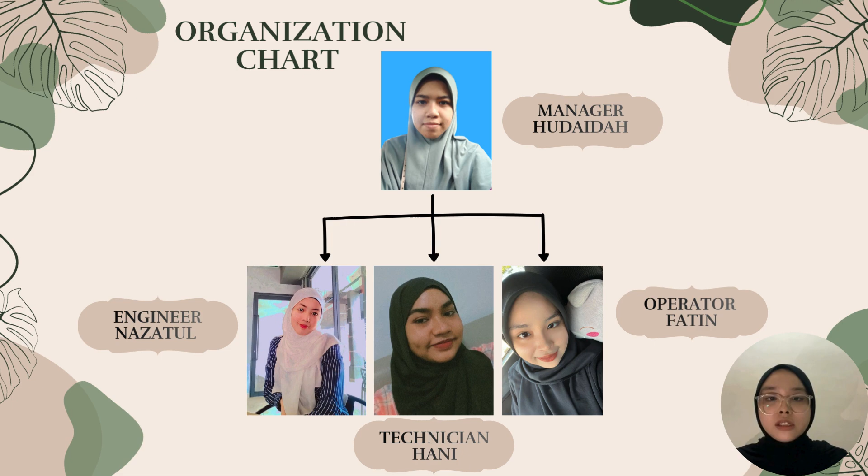I would like to begin my presentation by introducing the background of our study, which focuses on wastewater management in the Hulu Langat area, Selangor. Effective wastewater management is very important because it plays a key role in protecting both public health and the environment. Wastewater that is not properly treated can contaminate rivers, groundwater, and surrounding ecosystem, which may lead to serious environmental degradation and health risks for nearby communities.

In recent years, rapid urbanization has occurred in Selangor, particularly in the Hulu Langat district. This rapid development has resulted in a significant increase in population, housing areas, and industry activities. As a consequence, the volume of wastewater generated has increased, along with higher pollutant loads into the wastewater treatment system.

Hulu Langat has experienced significant development pressure, especially from residential and commercial growth. This development placed a heavy burden on the existing wastewater treatment plants. Many of these treatment facilities were originally designed to serve smaller populations and lower wastewater loads. However, due to current growth, several plants are now operating near or even beyond capacity.

When wastewater treatment plants operate beyond capacity, their efficiency may decrease. This can result in incomplete treatment, higher pollutant discharge, and potential non-compliance with environmental regulations. Over time, this situation may negatively affect river water quality and downstream ecosystems.

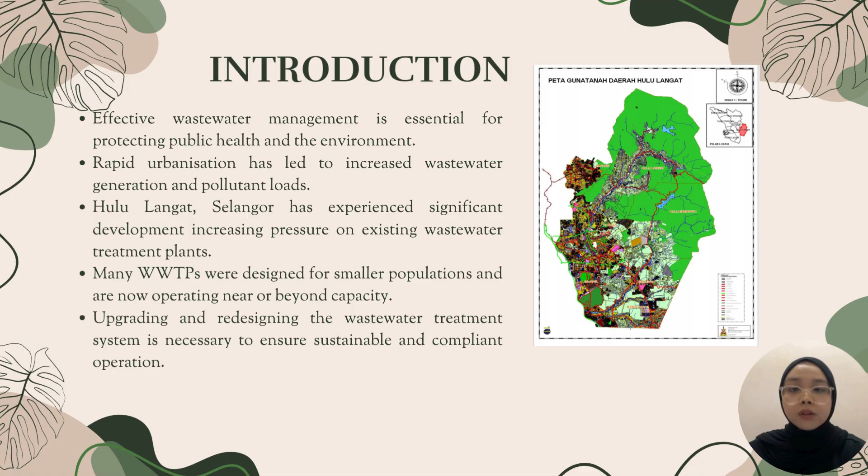This study highlights the urgent need for effective wastewater management planning in Hulu Langat. Understanding the current challenges faced by wastewater treatment plants is essential to support sustainable development, protect water resources, and safeguard public health for future generations.

Next, I will explain the problem statement of this study. One of the main issues faced in the Hulu Langat area is rapid land use change. Urban development such as housing, commercial areas, and road construction has significantly altered the natural landscape. As a result, surface runoff has increased, carrying higher amounts of sediment and organic matter into the wastewater system.

These changes have placed additional stress on the existing wastewater treatment plants. Most of the current WWTPs in Hulu Langat were originally designed to handle lower flow rates and smaller population equivalents. However, due to rapid development, many of these plants are now operating under overload conditions, which reduces their overall performance.

Another major problem is the high sediment and organic content in the incoming wastewater. Excessive sediment interferes with primary treatment processes such as screening and grit removal. When these systems are overwhelmed, sediment can pass through to downstream treatment units, causing operational inefficiencies.

Operational issues have also been observed within the treatment plants. These include increased sludge blanket rise, reduced treatment efficiency, and higher maintenance requirements. Such problems not only increase operational costs but also raise the risk of system failure and non-compliance with discharge standards.

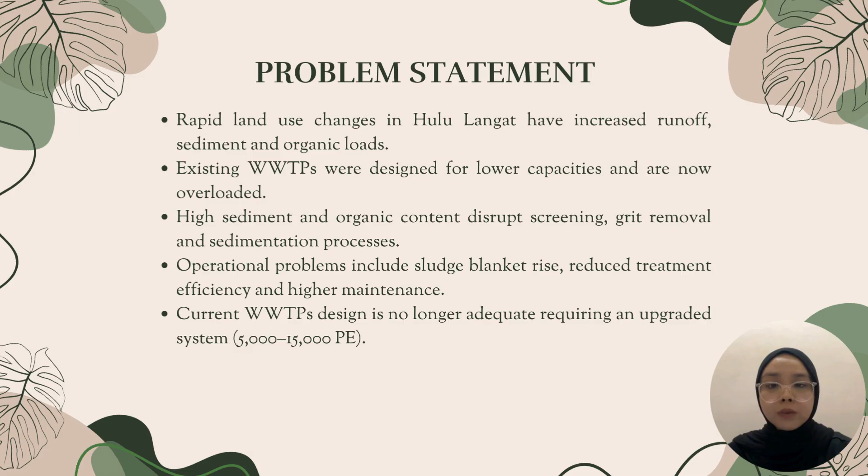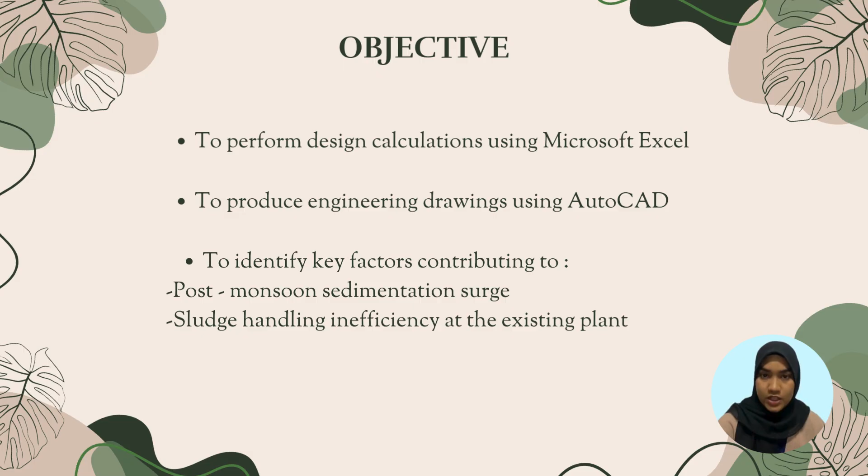Next, I would like to explain the objective of this project. The main objective is to carry out design calculations using Microsoft Excel and to prepare engineering drawings using AutoCAD. Furthermore, this project aims to identify the factors contributing to post-monsoon sedimentation and sludge handling problems at the treatment plant.

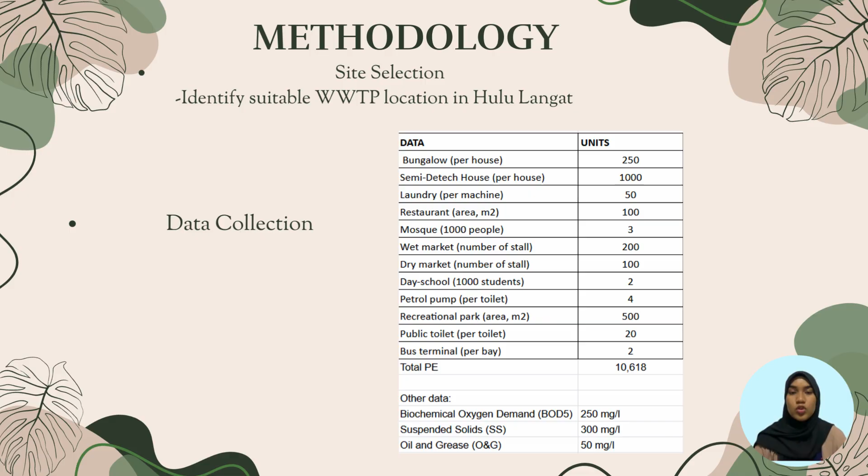For the methodology, I will start with the site selection and data collection. The selected location for this project is Hulu Langat, which is a semi-urban area. In the data collection stage, we collected important design data such as population equivalence to estimate the wastewater flow and loading for the treatment plant design.

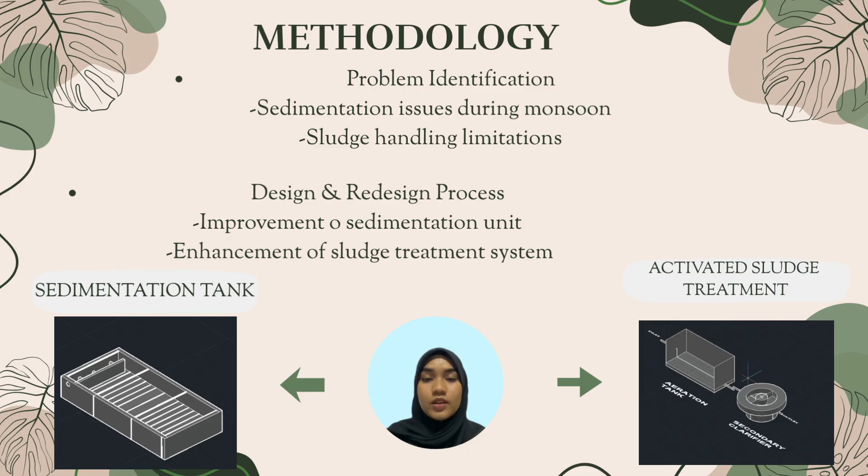For the design tools, Microsoft Excel was used to perform all design calculations, such as flow estimation and unit sizing. AutoCAD was used to prepare the layout and unit drawings for the wastewater treatment plant. These tools help ensure that the design is accurate and clearly presented.

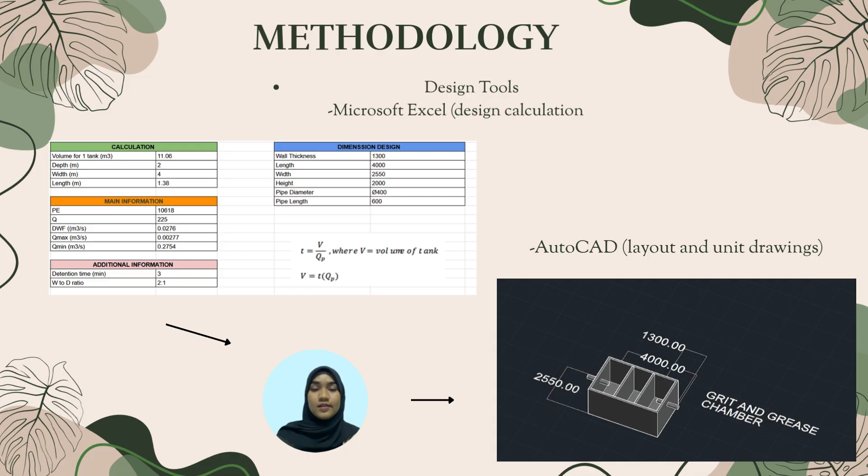Finally, the design was evaluated to ensure compliance with the Malaysian Sewerage Industry Guideline, and all findings will be compiled into the final report. That's all for me. I would like to pass to the next presenter.

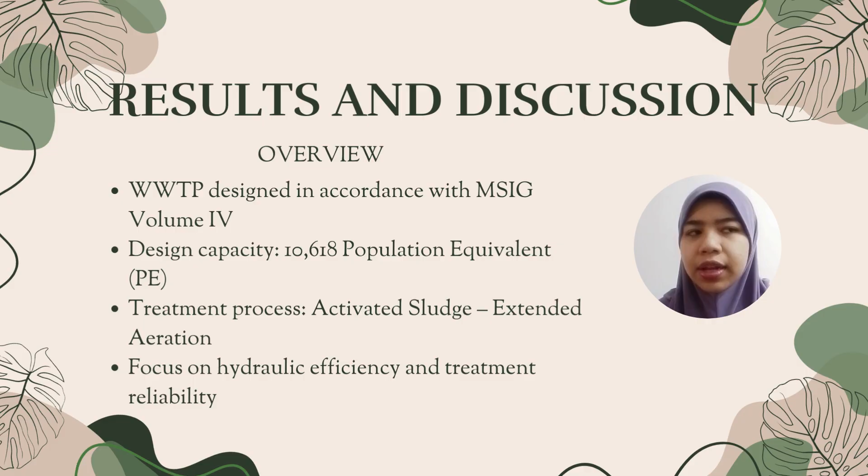For this section, I will present the result and discussion of our wastewater treatment plant design. The plant was designed based on MSIG Volume 4 with a total design capacity of 10,618 population equivalent. We adopted an activated sludge process with extended aeration to ensure stable treatment performance and compliance with design guidelines.

The influent wastewater characteristic used in the design represent typical domestic wastewater. The influent BOD is 250 milligrams per liter, suspended solids is 300 milligrams per liter, and oil and grease is 50 milligrams per liter. These values indicate moderate organic loading, which is suitable for biological treatment using the activated sludge process.

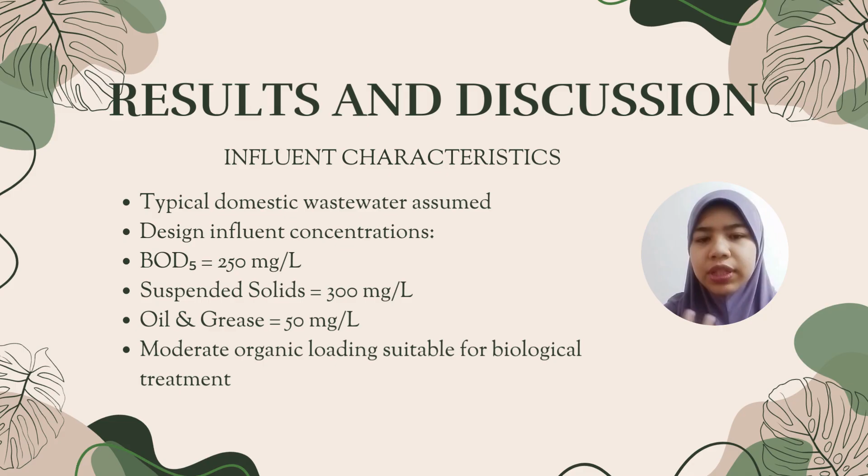The wastewater flow was estimated using a per capita flow rate of 225 liters per person per day. This resulted in an average daily flow of 2,389 cubic meters per day. A peaking factor of 3.62 was applied to account for daily variation, giving a maximum flow of 0.100 cubic meters per second.

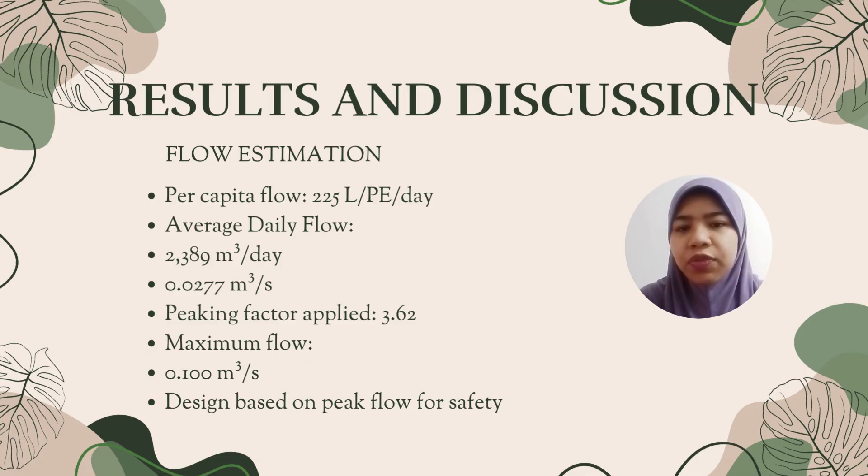All treatment units were designed on this peak flow to ensure safe operation. A mechanical coarse screening unit was provided at this first treatment stage. The screening channel width was revised to 1.5 meters with a total of 43 bars, each having 25 millimeters clear spacing. A 25% blockage allowance was applied to account for partial clogging. This design reduced flow velocity and head loss while effectively removing large debris and protecting downstream units.

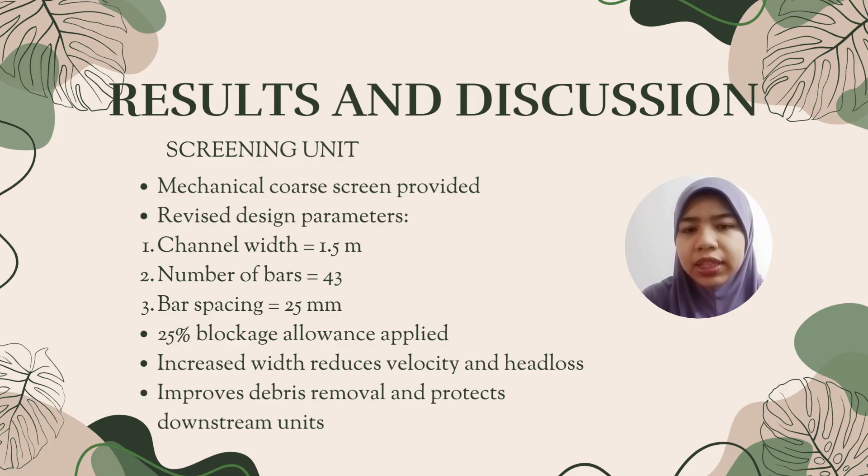After screening, a horizontal flow grit chamber was designed to remove sand and grit. The chamber operates at a horizontal velocity of 0.2 meters per second with a detention time of 3 minutes. This allows inorganic particles to settle while preventing organic solids from depositing. Effective grit removal helps reduce abrasion and maintenance issues in downstream equipment.

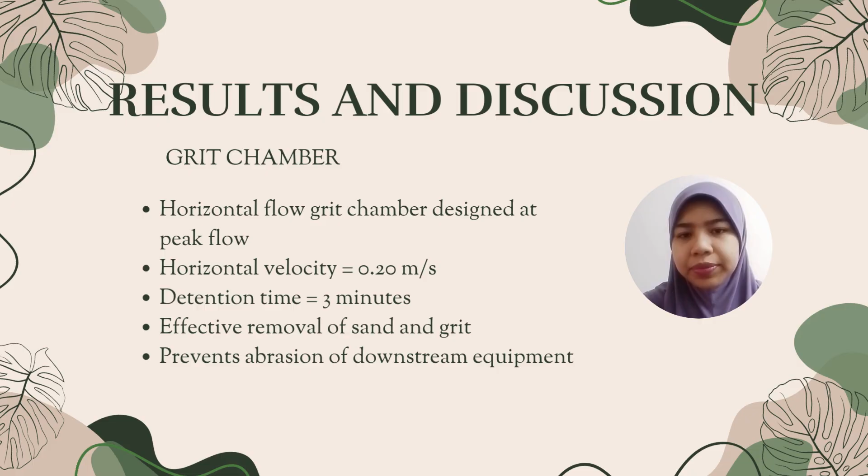A grease chamber was included to remove oil and grease before biological treatment. The chamber was designed with a detention time of 20 minutes to allow grease to float to the surface. Removing oil and grease at this stage prevents foaming, diffuser clogging, and oxygen transfer problems in the aeration tank. This improves overall plant reliability and performance.

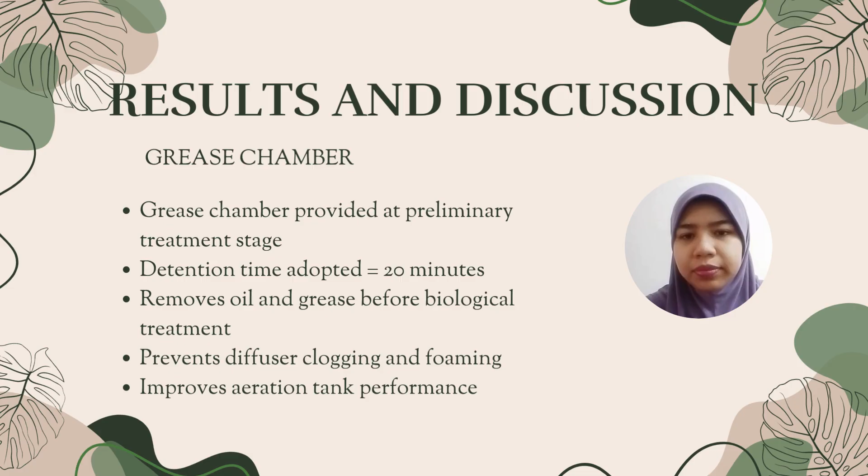The biological treatment system uses an extended aeration activated sludge process. An F/M ratio of approximately 0.05 per day was adopted, which is typical for extended aeration systems. The mixed liquor suspended solids concentration was assumed to be about 3,000 milligrams per liter. Fine bubble diffusers were used to provide efficient oxygen transfer and uniform mixing.

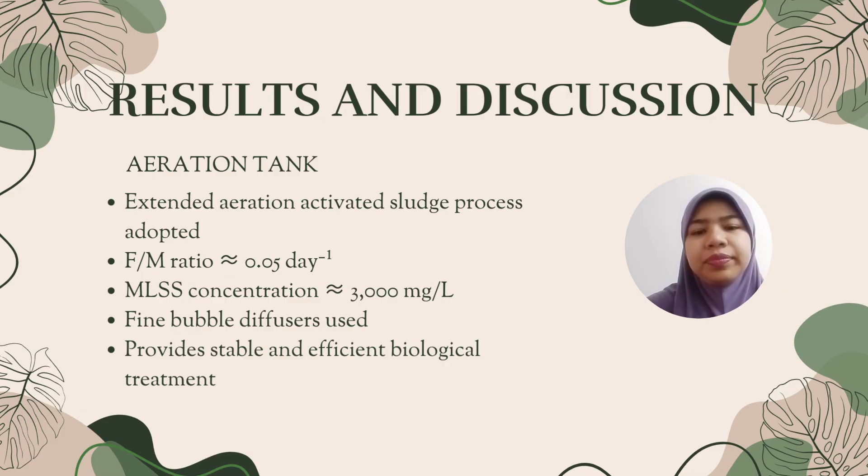The low F/M ratio indicates that there are sufficient microorganisms to treat the incoming organic load. This results in high BOD removal efficiency and lower excess sludge production. Extended aeration also provides stable performance under variable flow and loading conditions, making it suitable for this design capacity.

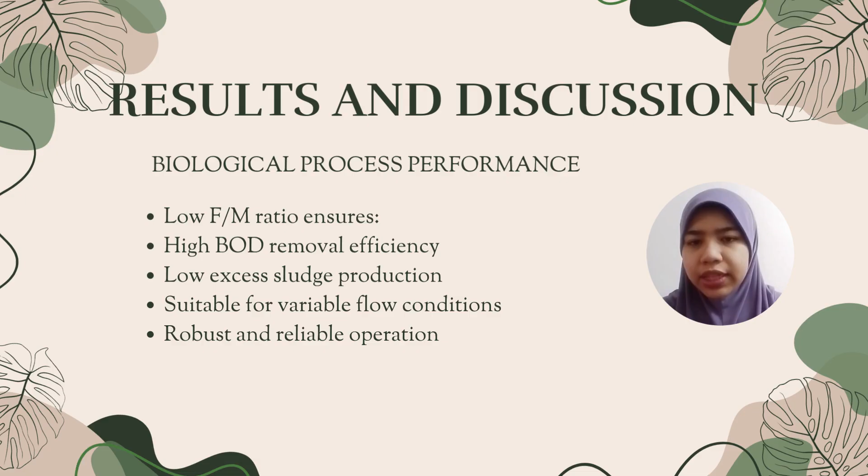Overall, all treatment units were designed in accordance with MSIG guidelines and include appropriate safety factors. The preliminary treatment units protect the biological process, while the extended aeration system ensures effective treatment. The integrated design allows the plant to operate reliably under peak flow conditions.

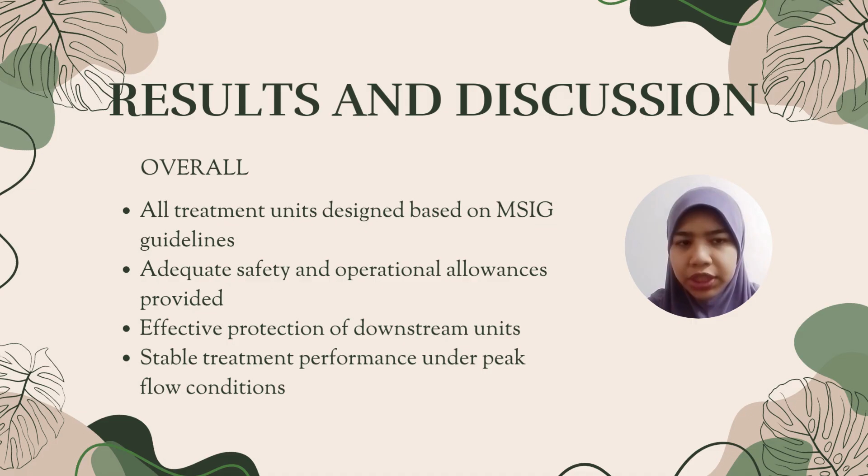One major entrepreneurial opportunity is the reuse of treated wastewater. The treated effluent can be used for irrigation, construction activities, and cleaning purposes. This reduces dependence on potable water and provides a continuous, low-cost water source. Businesses can be developed around supplying and managing reused treated water.

The opportunity comes from sludge treatment. Waste activated sludge from the treatment process can be processed into compost or organic fertilizer. This supports the circular economy by converting waste into useful products. It also reduces disposal costs and creates an additional source of revenue.

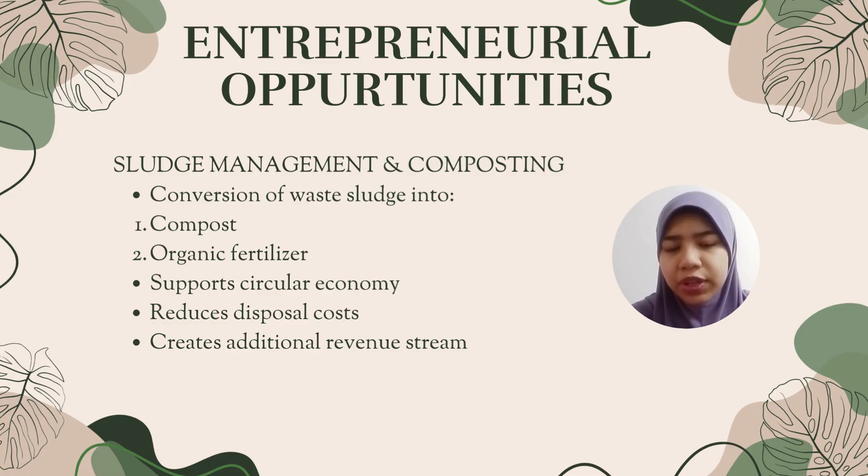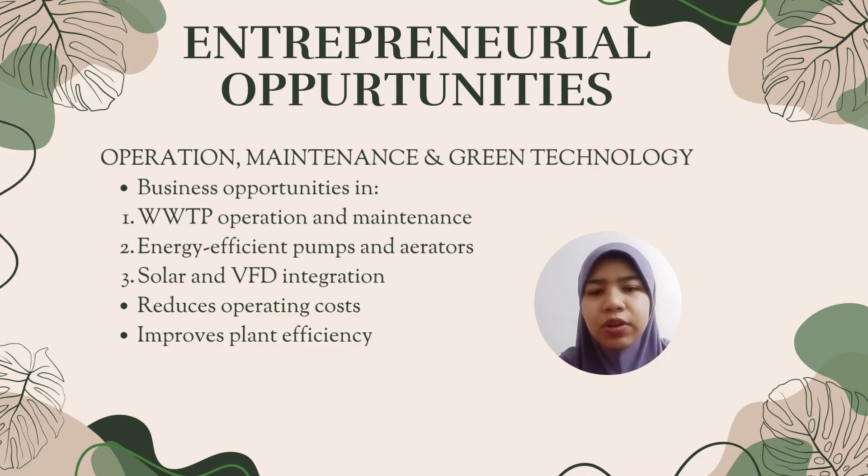Also, business opportunities exist in operating and maintaining the wastewater treatment plant. This includes services such as routine inspection, equipment maintenance, and system optimization. In addition, green technologies like energy efficient aerators, variable frequency drives, and solar power can be introduced to reduce operating costs and environmental impact.

Digital solutions and training services provide further entrepreneurial opportunities. Smart monitoring systems and automation can improve plant efficiency and compliance. The treatment plant can also be used as a training and educational platform for students and operators. Overall, these activities create jobs, support local business, and promote long-term sustainable growth.

Next, for the conclusion, the proposed wastewater treatment plant is designed to serve a population equivalent of 10,618 PE in accordance with the Malaysian Sewerage Industry Guideline, Volume 4. The design is based on typical household wastewater characteristics such as biochemical oxygen demand (BOD), suspended solids, and oil and grease, ensuring that the selected treatment processes are suitable for domestic sewage.

The hydraulic design considers average, peak and minimum flow conditions so that the treatment system can operate smoothly during daily flow variation and extreme flow situations. The preliminary treatment units, which include screening, grit chamber, and grease chamber, are properly sized to remove coarse solids, inorganic grit, and oil and grease, thereby protecting downstream treatment processes from damage, clogging, and operation problems.

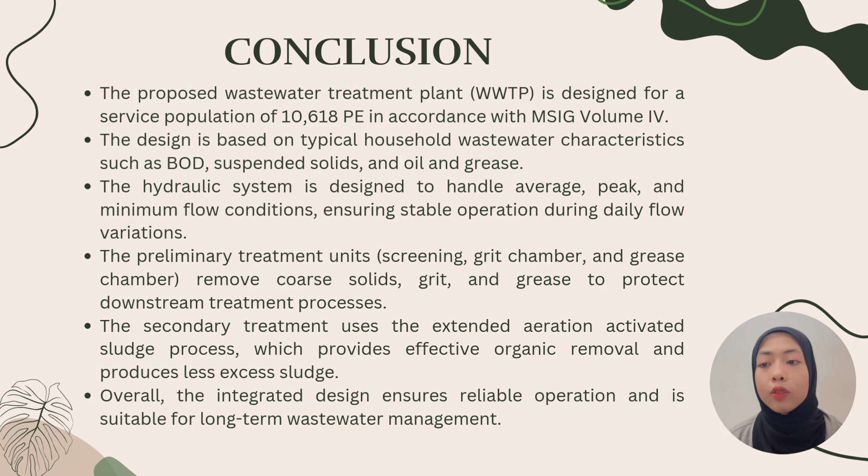The secondary treatment process uses the extended aeration activated sludge system, which provides effective organic removal, a stable biological environment, and reduced excess sludge production. Overall, the integrated hydraulic and process design ensures that the proposed wastewater treatment plant can operate reliably under various flow conditions and is suitable for long-term wastewater management. That's all from us. Thank you.